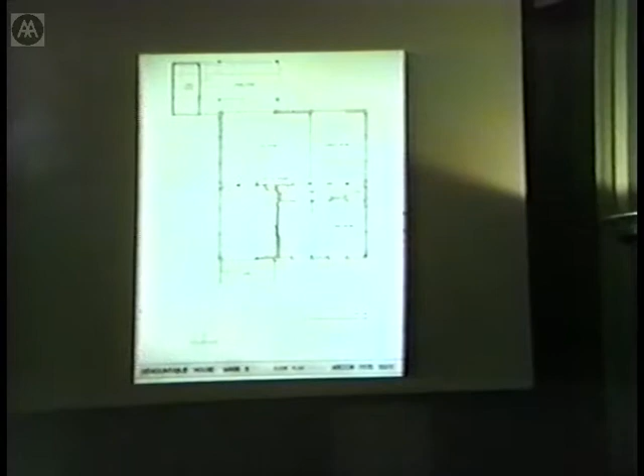The plumbing was a heart unit, a kitchen bathroom unit, which we designed for radiation. The idea was that it was prefabricated as a unit, brought to the site on a low loader, and just dropped into position. You'll see on this plan, and on most of the plans, there's a lot of fittings and furniture. This was typical of housing at that time, where it was obviously going to be difficult to get furniture, so I wanted to reduce the amount of furniture to be supplied to the minimum.

This is a model which, for some reason, was taken to Canada. There's one of the little houses, and the site is shown this way to illustrate how these small Franki piles provide you with a level surface.

We went on trying to use piles on housing because it does divorce you from the irregularities of the ground, and it's easy to get a level surface.

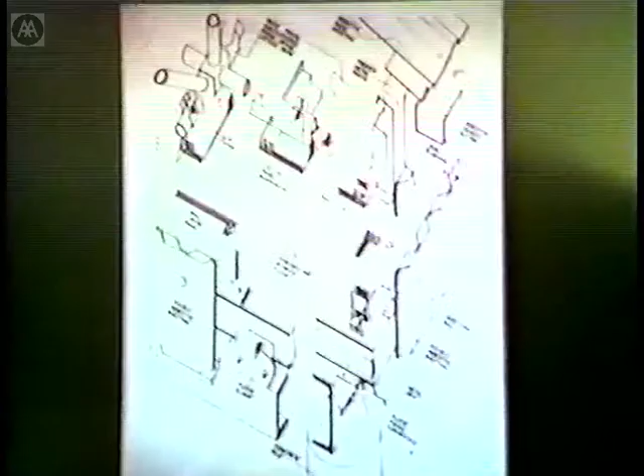This is the construction. I won't go into too much detail here, but the main structure is on two columns with the roof cantilevering out, the roof in tubes, rigidified by the gable ends, which were light steel framing.

Light steel framing on both back and front, with external cladding of asbestos, with that profile which we'd worked out a year previously for various projects we had.

You see double asbestos, an airspace, an inch of fiberglass, and plasterboard. So the insulation was much better than an 11-inch cavity wall.

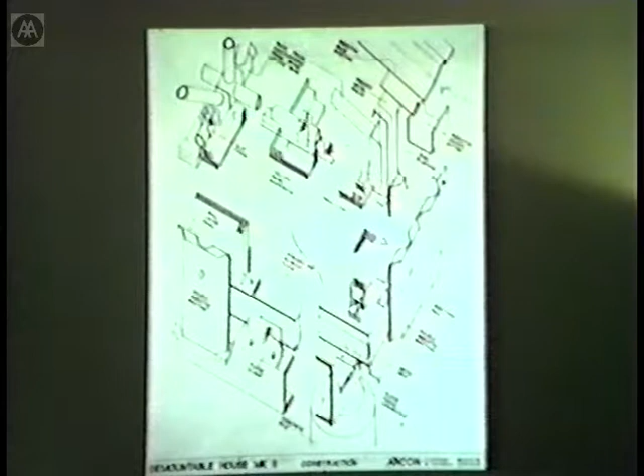It's a pity the asbestos people, Turners, had that panel, which is based on the width of a blanket, an asbestos blanket, and the house indeed was on a 3-foot grid based on the blanket.

Unfortunately, when the ministry changed our plan, they made us go onto a 2'11" grid, which meant that, A, they wasted a lot of asbestos, and B, that the patterns which they'd used were not suitable for use after the war.

So the asbestos industry didn't go on. I think they were stupid not to, but as you know, that sort of profile now is used by the aluminium and steel manufacturers.

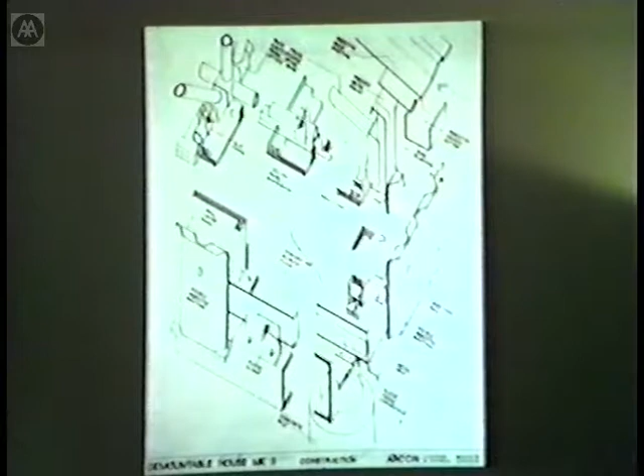This was the front of the house. Dustbin on one side and coal bin on the other, and that's the kitchen in front of it. And the back of the house.

Lord Portal came onto the site, walked through the house with us, and turned around and said, put it on the ground, the front door in the middle, and I want 86,000 houses.

So we went away. Obviously, we realized that we had to do a bit more than that. We were glad he said the front door in the middle, because the ministry plan, or Portal plan, which we didn't like, had the door to the side and was not a very pleasant plan anyway. So it gave us the opportunity of doing a new plan.

At this time, Parliament were getting concerned about these emergency houses. They were concerned that these houses were going to be put up and left up forever. They were also concerned that not many people were getting into the Act.

So they decided that more people should be asked to provide solutions to this problem, and they would want to see another prototype.

This was July. So by September the 23rd, when Parliament reconvened, we had to redesign the house, draw out all the components, get them made and put up at another site, the Tate Gallery.

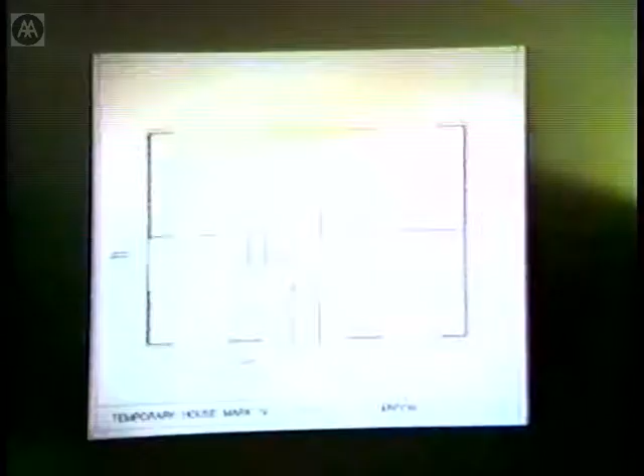This was our next plan, again based on the 3-foot grid. The kitchen bathroom unit was the ministry unit, and that was not taken onto the site in one unit, it was taken in pieces and assembled on the site.

As you can see, there are many more cupboards in that than in the other suite. Better than our original plan, I think, got a separate WC, and it is a bit bigger.

That is 650 square feet, again slightly bigger than the ministry's because they cut a piece out where the kitchen is, to get away into a side door.

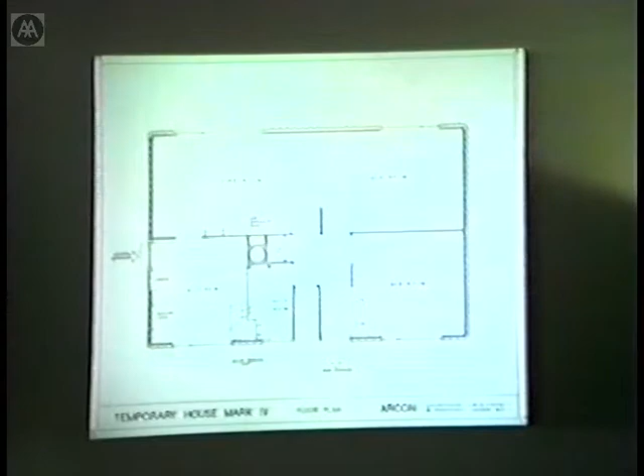This is the structure. This was purely a mock-up. We couldn't, in the time, possibly design for mass production. So the steel frame and so on, just what we could get hold of.

But again, we'd use the external cladding, we'd use the same kind of internal partitions. We streamlined the method of locating and lining up the panels.

We improved the ceiling panels and the structure. This is just tubular roof trusses sitting on a steel frame.

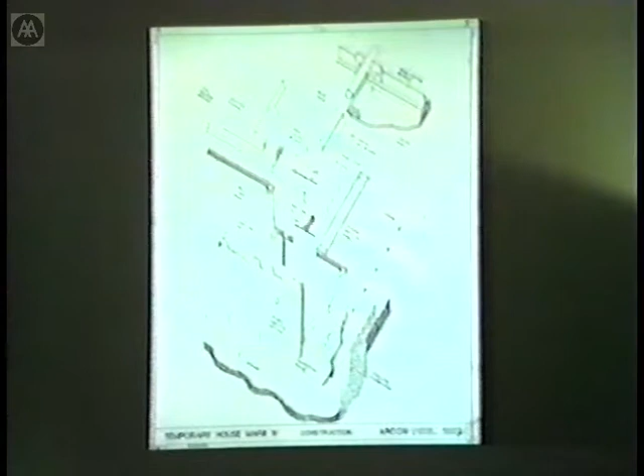This is the outside of the house, the back. When this was put out, we had people sitting listening to the various authorities, the local authorities who came around, MPs and so on, listening to criticisms.

Unfortunately, most of the criticisms were things like they don't like glass at the bottom of the window because they get broken. So on the final house, that was filled in as solid.

The snag of talking about houses in mass, 86,000 houses, is that every time you talk about anything like that little pagoda, everybody multiplies it by 86,000 and likes to save a lot of money.

Essentially, the colour of the house was chlorinated rubber paint, and it was a brown colour. The colour was selected by Rodney Thomas, who picked a leaf up crossing Green Park. And we sent that to the manufacturers who very decently didn't complain.

This is one of the side doors. The whole thing was pretty well detailed and pretty neat. You can see the fixings. The outer fixings were toggle bolts, which were screwed in and out, so you could take the sheets off if anything broke. But we had the problem of whether children would take the sheets off if we left them like that. So there were little tiny studs, rather like the top of a billiard cue, pushed in afterwards.

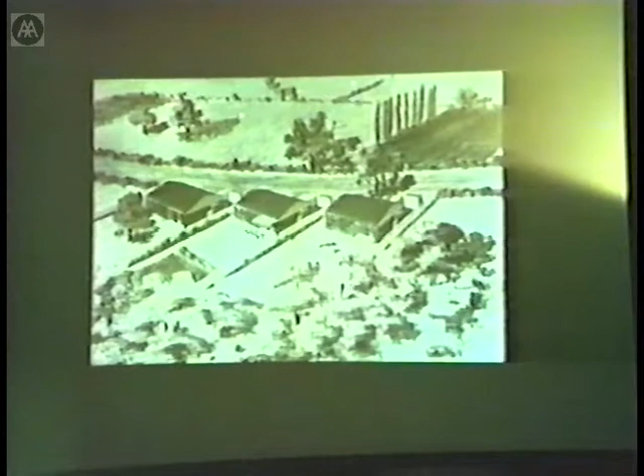And this is a perspective which Rod Thomas did, showing the houses as far as you can imagine.

It's interesting that an MI5 gentleman came to see us, and we thought we might have selected somewhere which had some secret business, but he asked if he could have some of the photographs. They were going to drop them behind enemy lines to show the Belgians and so on what was going to happen in Britain after the war.

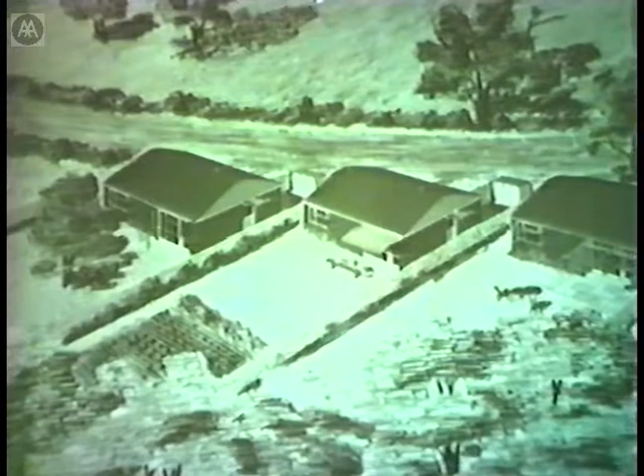And a number of these houses were put out in different parts of the world, in Cairo, Belgrade, and other places where our troops were, Hamburg, to show the chaps. And we have a lot of letters from the people who put them up - very interesting, the troubles they had, or didn't have.

So anyway, there we were with that house. Now this was October of '44, and we were given till the end of December. Actually we had 6 weeks to do full working drawings, shop drawings, and everything else for another house, for the new scheme. We managed to get to the following February by a bit of argument. Incidentally, we were not looked on as very decent chaps - we were always arguing about the difficulty of things.

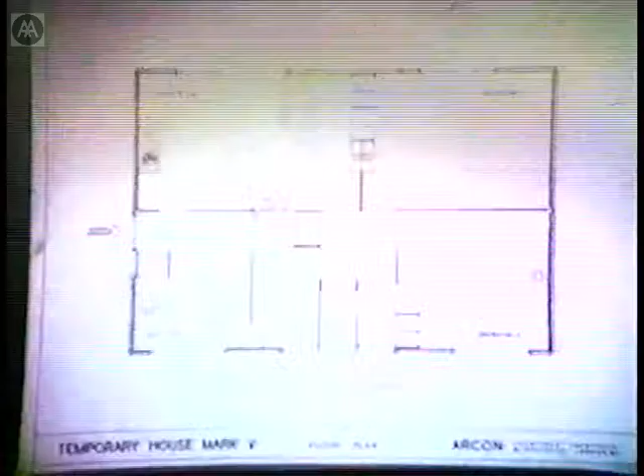The next house, which is now to the new dimensions, that's the standard Mark 5.

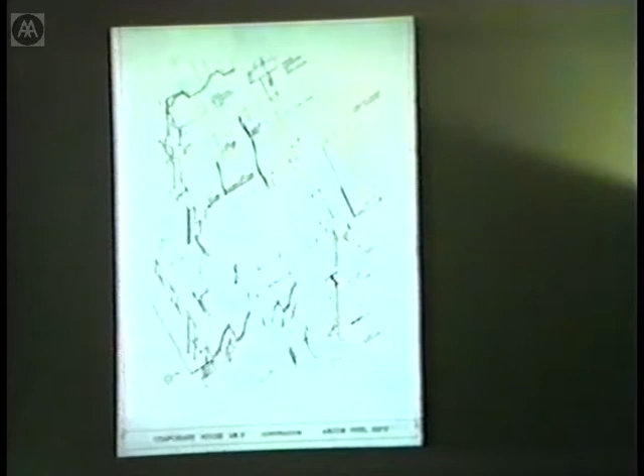And that's the structure. Because we had so many ordered, we could have the roll form sections specially designed and save a good deal of steel by doing that. The trusses that you see are still tubular. We went into a lot of problems on tolerances and corner techniques and cover techniques and so on - problems we'd learned to fight on the other jobs.

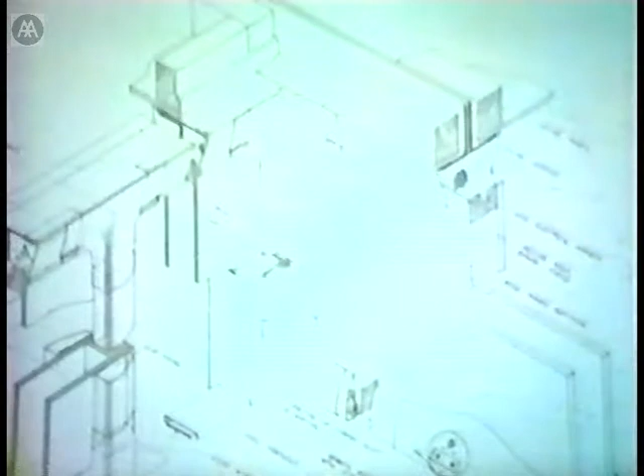This is the cover technique, which is intended to take up tolerance from the wall panels. I remember the chap designing that going frantic as we constantly changed the size of the timber panels because the government decided it had to come from Russia or Scandinavia or Canada or wherever it was, and the scantling size had altered. And he at last said, for God's sake, put in an intercom and announce every 10 minutes the thickness of the wall panels.

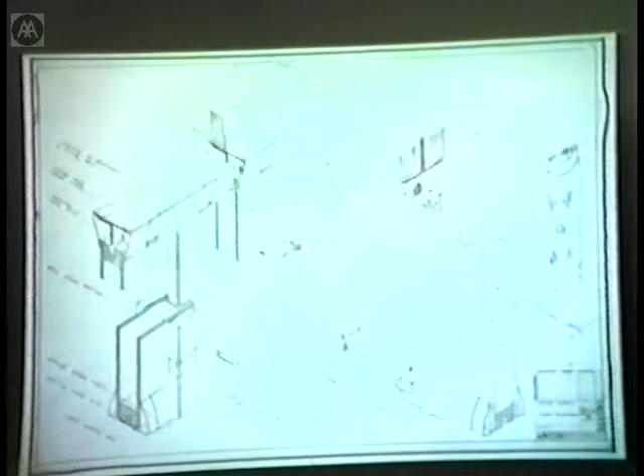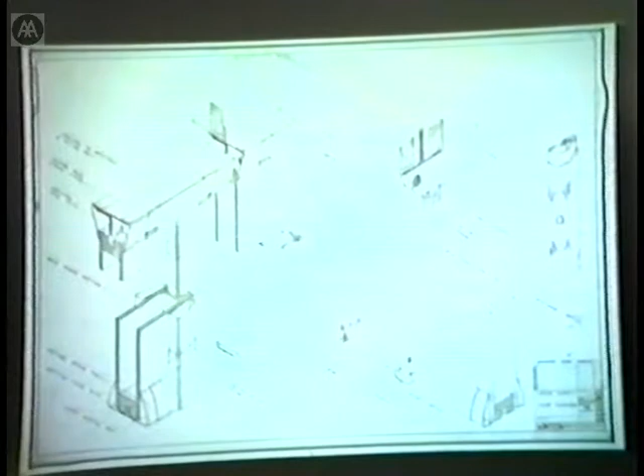Anyway, eventually we got it done and got it up. Before we go on, you can see that we had the switches pressed into the door surround and the socket outlet pressed into the skirtings. These things were just clipped on the bottom, but the corner connection had to be screwed on because it was necessary to get electrical continuity in the system. The electric wiring, as you see, went behind the curtain.

Well, that was the house. As you see, we had designed another element here over the entrance door. You see how we got over the entrance door being in the middle? It wasn't actually, but there was a wall panel in the middle, part of which was wooden. Unfortunately, we couldn't find any substitute for chlorinated rubber paint to paint the actual cladding, so we were made to leave it as it was.

Now, I think that's - well, yes, I would say, no, this is, I think, another one. Yes? I think this is another slide. I see, I thought it was another one.

I was going to tell you that these houses were put up at Crayford and Croydon, the first 100 houses, and they were used to take films of the erection and to time the erection and so on.

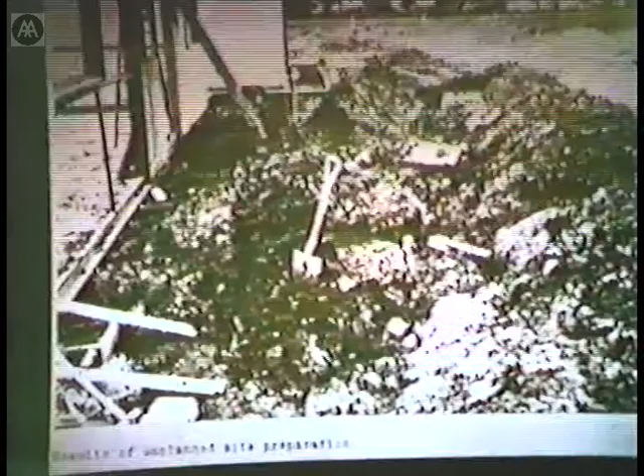Now, the erection of the house took 107 man-hours. Actually, 390 man-hours was allowed for bonus payments, but it was put up in less. In fact, one house was put up starting at 5 in the morning, and they had a habitation certificate by midday. But the houses took between 8 and 10 months from the handover of the site, including foundation and so on. I put this in just to show why it took so long, from 390 hours to the finish of the job.

This was a problem which we didn't tackle till after the Mark V. Now, I've only dealt with the design side. The problem of the organisation necessary to get these bits from the manufacturers onto the site, checking, preparing drawings of jigs and so on, were all done by Taylor Woodrow, who throughout the job employed 6,000 people on that side. We had about 20 people doing our bit, but it was an enormous task. They had 30 centres from which they distributed things, and collecting that stuff together was a fantastic business. Besides, as we said earlier, much of it was done during wartime, when it was very difficult to get work done.

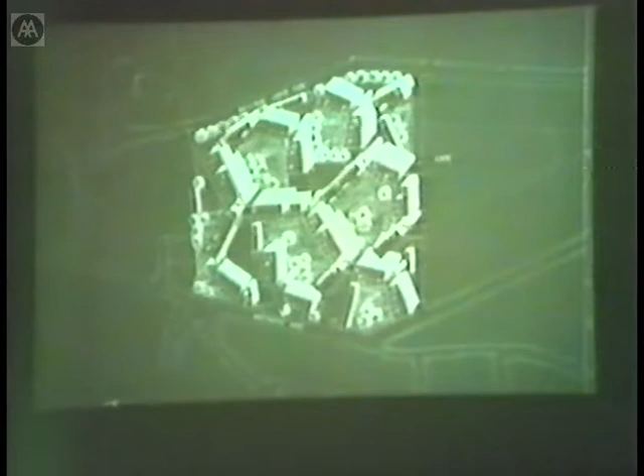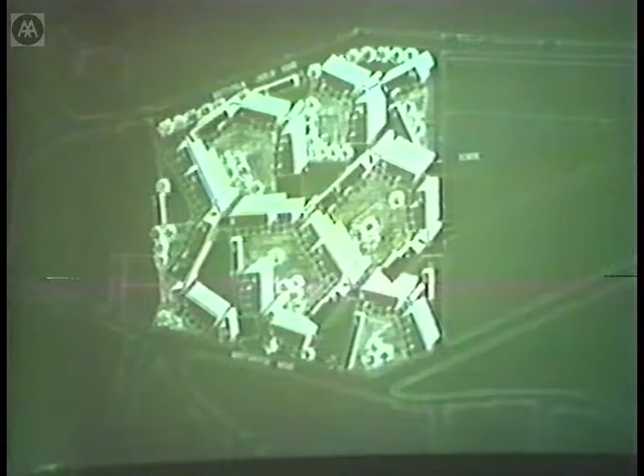I designed with a group of people for three sites in the LCC. We developed a system of houses and flats which could be strung together along decks and arranged according to the shapes and needs of each site.

In doing it, one began to find that by putting the units next to each other in a continuous way, whatever the size, and above each other, inevitably they had to relate in terms of dimensions and services. And it led one, rather naturally, to think of making bits which were standardized in the factory.

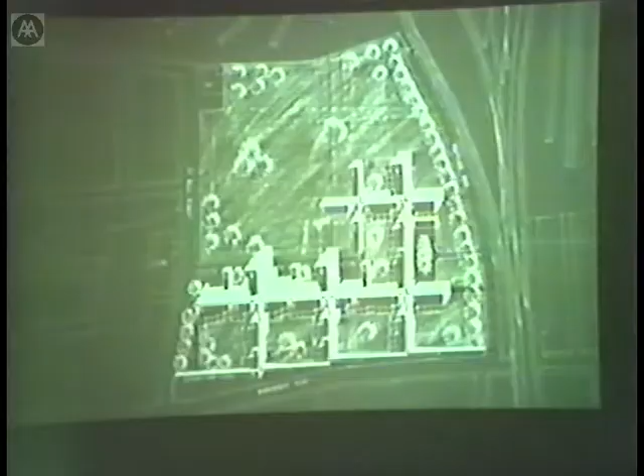Systems really tended to exist abroad at that time. We asked Kenneth Campbell, who was then in charge of the housing division, if we could investigate systems for this method of housing for different sites. He said, we tried it after the war, it's too expensive, it's no good.

But in fact investigations were going ahead, though systems as they existed tended to be really the panelization of slab blocks.

You subdivided a slab into a set of bits which could then only produce that slab. It wasn't a Lego, it wasn't a flexible concept, it wasn't a system that one could understand, at least as an architect. It was simply a way of prefabricating a set of panels out of which you could only make the same model aeroplane. There was no alternative possible.

I had an opportunity in the LCC of working on that sort of system, and in fact worked on Morris Walk in Woolwich, where one was also obliged to develop tall and low blocks with a given system.

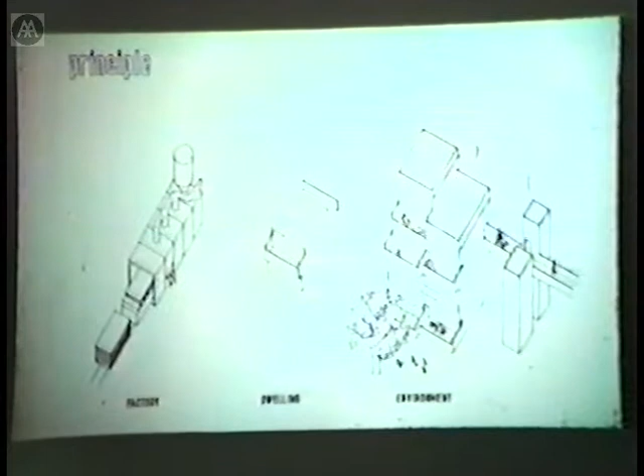So the system we developed was really this. It was an awfully simple idea. It was really a family of houses and flats, maisonettes and flats, which you could stack up one above another and next to each other, and to which you could add your towers and bridges. And because, as with that earlier LCC idea, they had physically to be related, they naturally shared dimensions and services, and were therefore suited to factory production, whatever the factory, whatever the material.

So this was the family of house types, of various sizes, to look in different ways, with different internal arrangements.

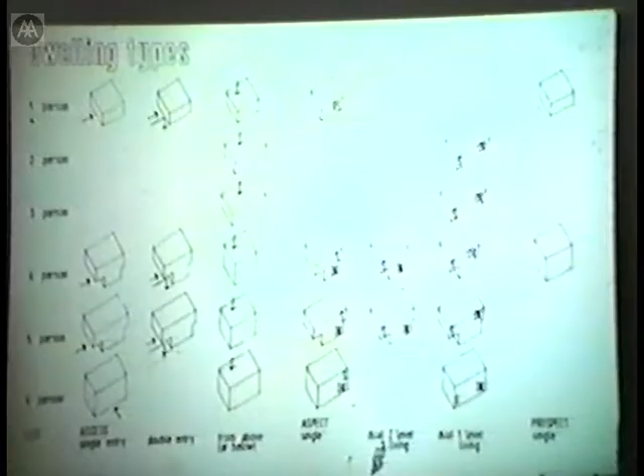That was how they could be, some of the ways they could be stacked up. And that was the sort of basic concept of how they might be subdivided.

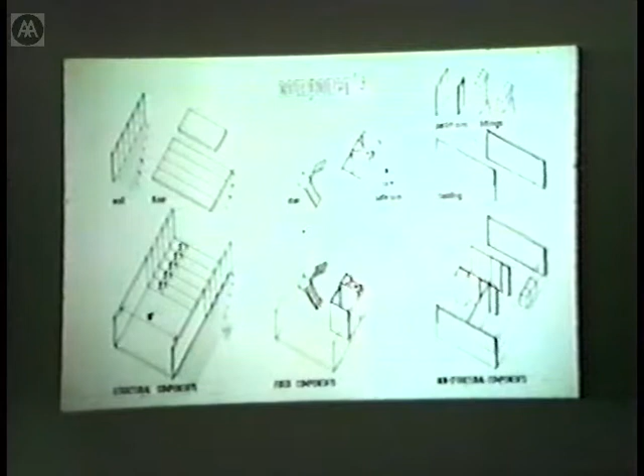What we did was to get together a program of 4,500 houses to be built over 3 years, and a performance specification, asking 3 very carefully selected contractors to show how they would be able to create these volumes, whatever material it might be, although we knew 99% of the existing systems were in fact concrete. We hoped maybe the cladding at least might be pressed steel or something, but concrete constantly was the best buy.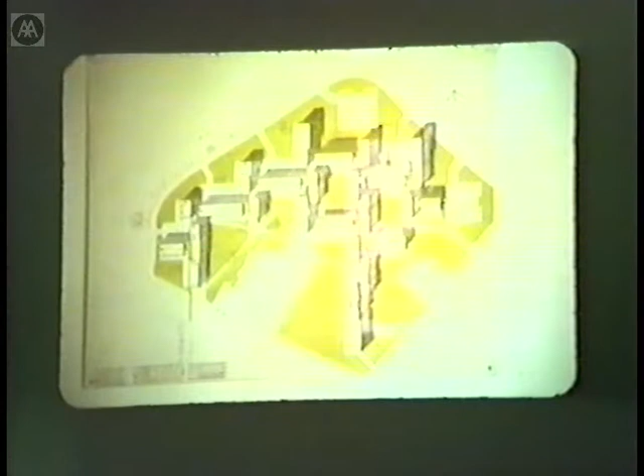As it was underway, and I'd been 6 years in Leeds, I left, and coincidentally at that time a whole series of events happened. The 4 cities had all been staunchly Labour, and it was a great joint Labour exercise which the councils enjoyed, and 2 new Conservative councils immediately withdrew and abandoned their second sites.

There was almost a stop in the production of housing, an enormous cutback in the housing programme. Whereas before high densities had been encouraged and subsidised in the centre of towns, there was a swing against high densities. And the final disaster, of course, was Ronan Point, all in 1968.

So suddenly, in the first site in Leeds, where people who'd painfully waited to be rehoused in Hunslet, for which they still retain some affection, were moved out, the gas heating was ripped out. Electric heating was put in, to be followed rapidly by paraffin heaters and condensation.

I think another aspect which I still believe in is that housing should have an ordinary quality, and that one should aim for it. It should neither seek, on the whole, except in very special situations, to be high architecture, nor low populism, if you like.

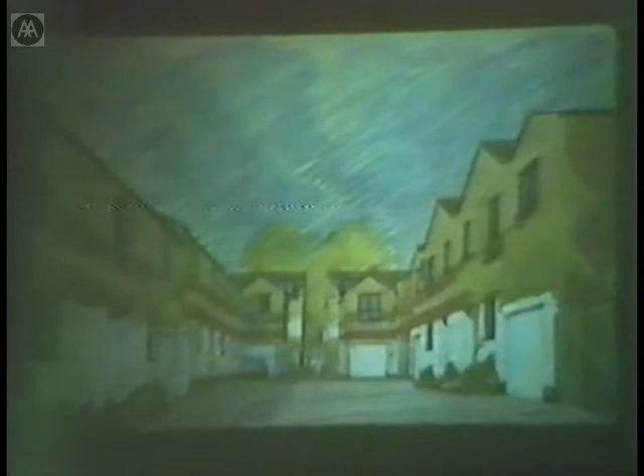And finally, I think, in spite of these setbacks, one has to continue to try to progress. That's the end, that's the last. That's it.

Lastly, Richard Rogers, I won't say he needs no introduction, he probably needs a long introduction, but there's a bit of time. At lunch last week he said he was going to talk about industry. I have some sense of idea what he's going to talk about. I haven't a phrase of my own to introduce him with, but by accident I stumbled on a bit of Jencks from Bizarre Architecture, coupled with a remark somebody made to me the other day, that you look like the Leonard Sachs who introduces those pseudo-Victorian old-time music hall things with a gavel. So I will introduce Richard as that modern master of mechanomorphic metaphors. Richard.

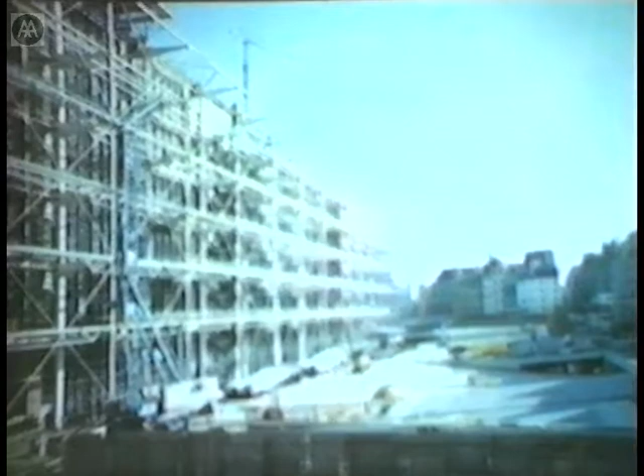Both are made out of component systems, and partly out of off-the-peg systems, but only partially. Specifically Beaubourg on the right, Centre Pompidou, which is big enough to have its own specially made components. These are not off the peg any longer. They're obviously - time, cost, control are all part of the philosophy.

But what we're trying to create is an expression which not only had a sort of technological excitement - which we were obviously excited by, and have always been excited by, the whole idea of technology - but also something where the framework was sufficiently loose to allow for change, and yet sufficiently clear to give a certain permanence.

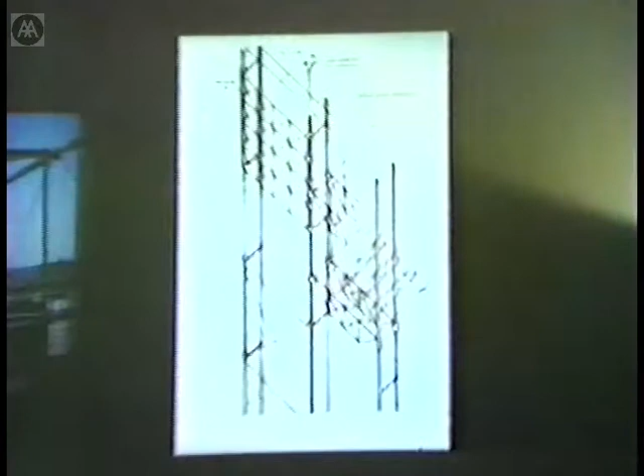On the right was the first sketch - in fact it was a competition drawing for the structure of Beaubourg. Two columns and a structure. The two columns were on the outside, in fact two walls really of structures. One was for mechanical services, another one was for movement systems.

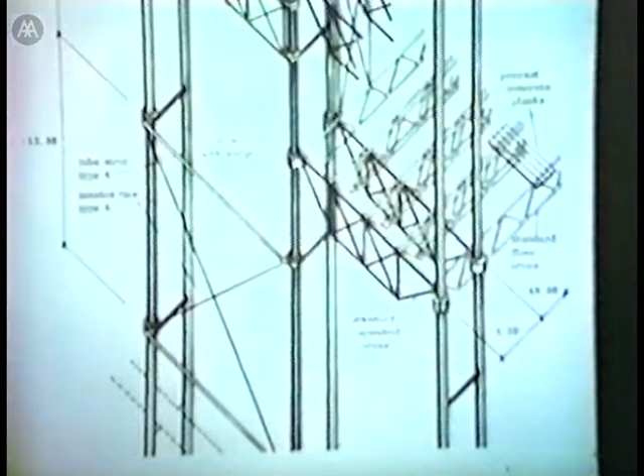The whole complexity about how to take a load of the beams spanning 48 meters between two columns was resolved on the left-hand side upon this system, which is in fact originally designed by Gerber, a German engineer of some 80 years ago, and the design of the bracket on the right.

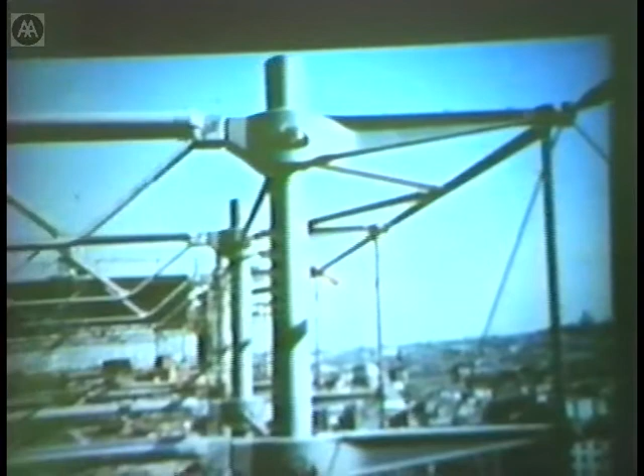Now there are hundreds, obviously thousands, of designs for a bracket system, and at that point there's this complex mixture between what is measurable and what is not measurable, between the science and the art.

The column, which is a water-filled column, and the bracket, and the way to minimize the load, and the excitement for us of working with engineers to try and work economically to span the 50 meters between the columns by pulling down on the right-hand side with tension cables and by expressing all the parts.

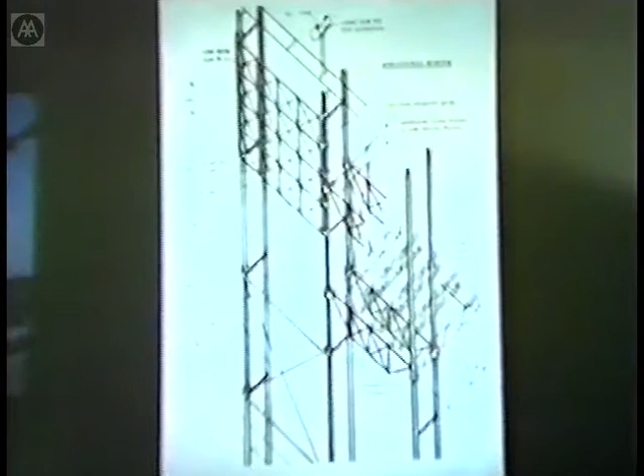In a sense, going back to Reliance Controls before, again a key element has always been to try and express, to create a language out of these parts, to make it legible from the outside. That to us is very much the way we look at the whole component system. What we like about components is a certain clarity of legibility - if you look at it you can see what each part is actually doing.

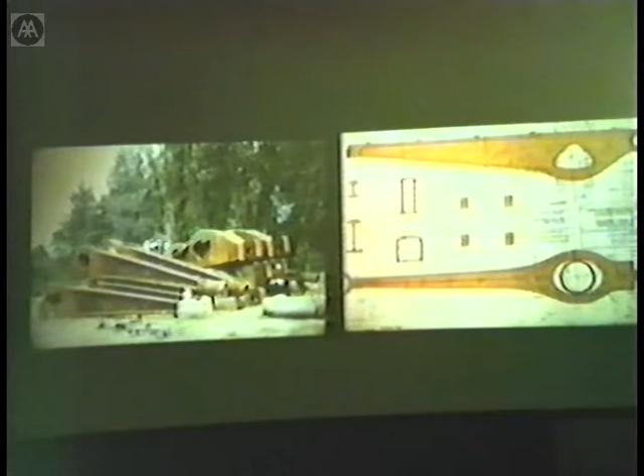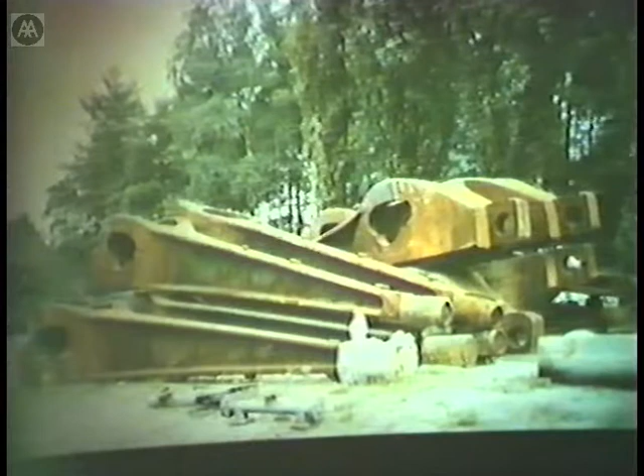And the study - here again, the whole study of detail, the idea and the excitement we got in actually forming the different parts and trying to shape them in a way which both met the functional needs, but also the architectural or the art need.

And so that is the Gerberette. That is a 10-ton bracket, and that's a casting. It was designed by Arups together with ourselves and built in Germany by Krupp. And those are the Gerberettes out in the wilderness - this relationship between the hard technological elements and people, or trees, and elements.

And the making and the design - for instance, the hole through which the column goes through, which has to be loose enough for the bracket to fit over the column and into place, and which has a million different shapes, but only a few of them which relate to the total building.

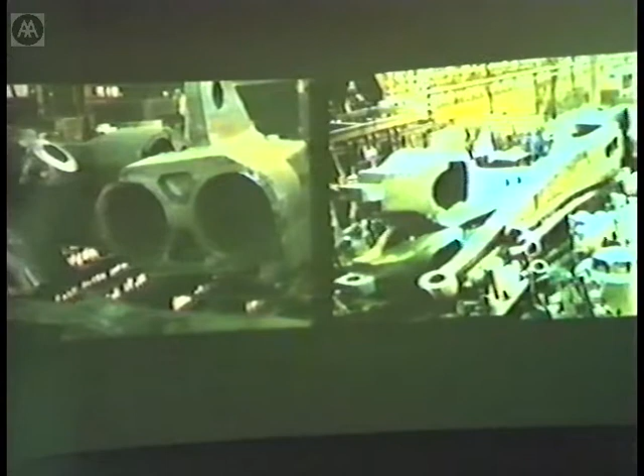This is the bracket, the sort of T-bracket, if you like, on the right. You can just about see the person on the right, which gives you the scale of the overall element.

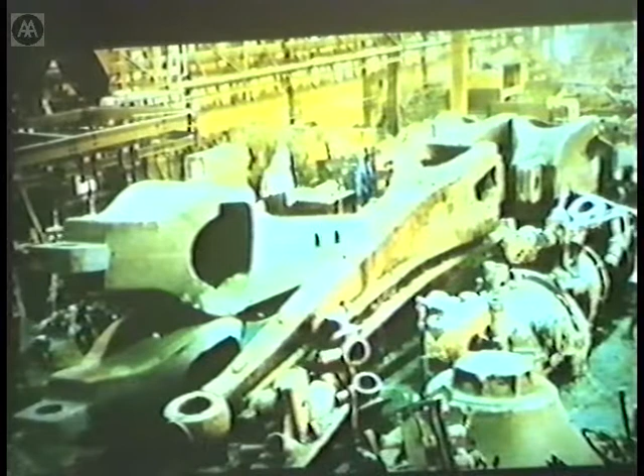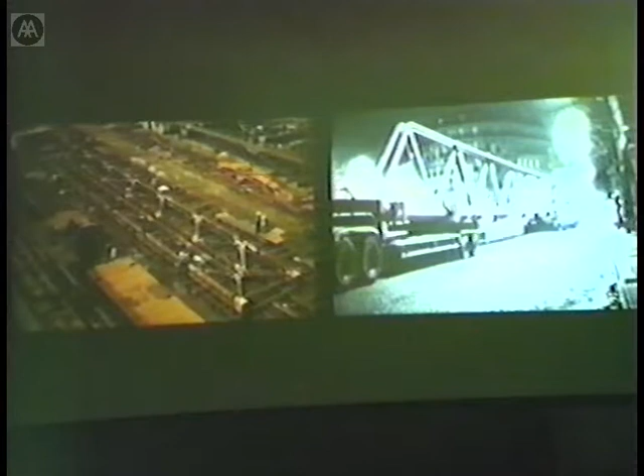We learnt a lot from studying Victorian stations, and then from studying some of the Japanese work done with cast steel. Basically three forms of steel were used: the beam, in which all the tension pieces were solid steel round, the compression pieces were tubes, and all the nodes, or Gerberettes, were castings. This really created the language, the continuity throughout the building.

Here's one of the beams, one of the 50-meter beams coming through Paris at night time. They would arrive once a week at 3 a.m., and every time, there would be a group of engineers and architects having a party, and lots of other people would turn up because it was an occasion. It was part of the excitement of building out there.

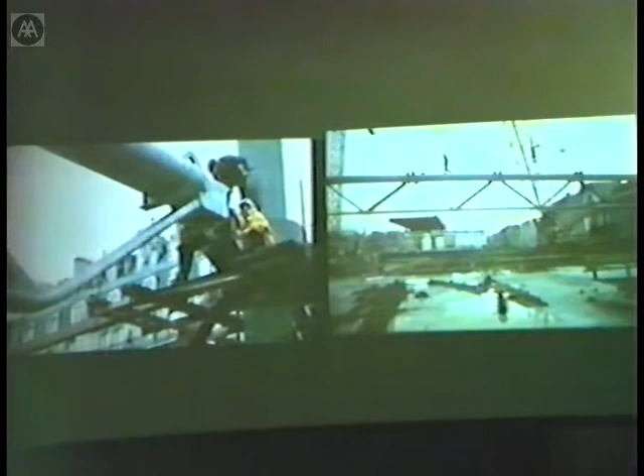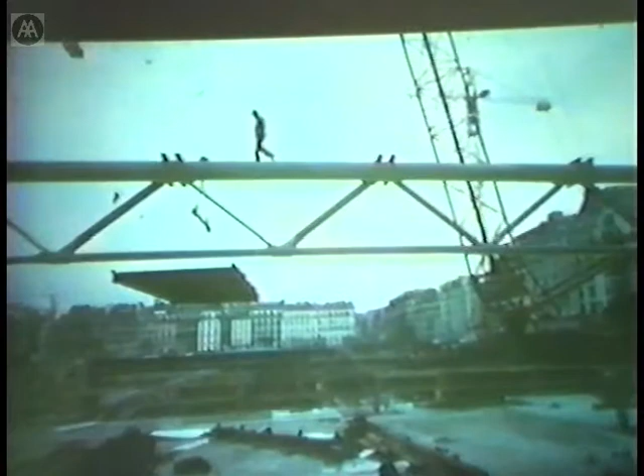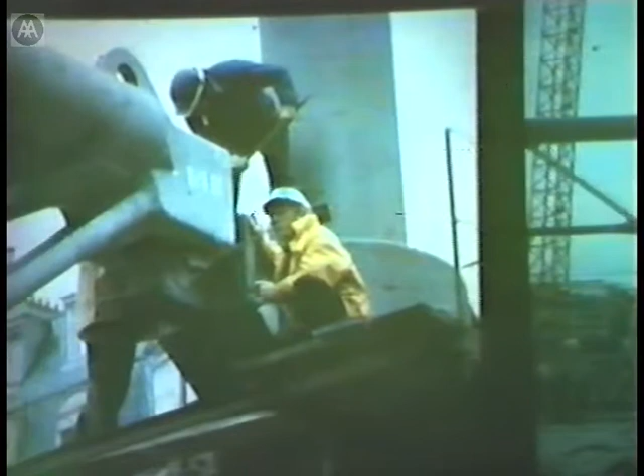They're putting it together dry, so that everything could move. There were no expansion joints because every piece, rather like a vertebra, could move. Everything moved so that it could take expansion, contraction, lateral, vertical and diagonal loads, and the scale of the pieces in relation to the human being meant each piece was expressed. If you look at the diagonals in the beam, each diagonal expresses the different force that acts on it.

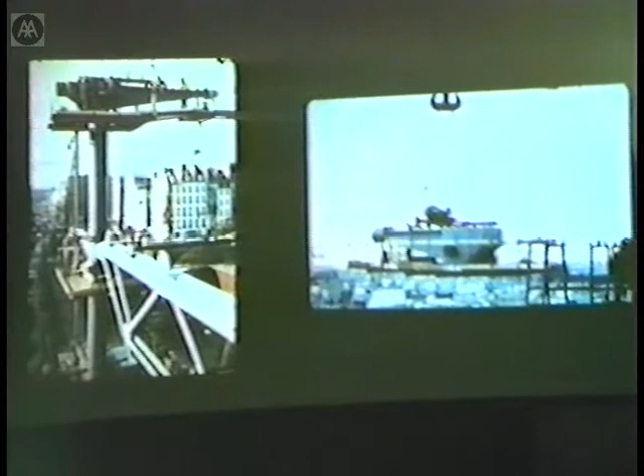The gerberette being dropped into place at a right angle and swung round. One of the strange parts of this building in Paris was that though we were all foreigners there, once we started to build, it became very clear we had to use French materials. Apart from anything else, our client was the Minister of Production, and his interest was obviously French production. But very soon we realized we were going to have major problems with the budget.

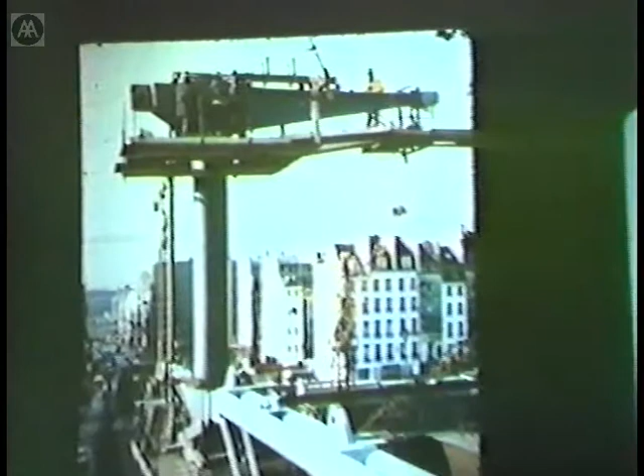We had a fixed budget, and the French industry were going to get into a ring. They clearly formed a ring, and we were sufficiently young and furious to try to break that ring. When we started to check out, we realized that nearly all major buildings, whether it was the Frei Otto's Olympic steel structures or the bridge over the Bosphorus, all these were pretty clearly, to our mind, rigged prices, and it was going to be very difficult to break through this ring.

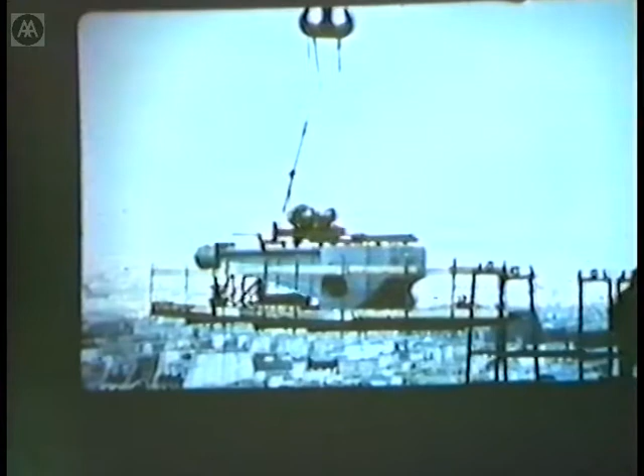We went to British Steel, American Steel, Italian Steel. They all said, of course, you're just green. The only people who dared to break the ring, of course, were those liberal organizations, Krupp Steel and Nippon Steel. We were basically allowed to use Krupp as long as we didn't tell anybody we were using Krupp.

In France, all buildings are built by Algerians, and the average French building site looks like an Algerian encampment, and they build very efficiently. When the Germans came in with their bright new blue uniforms and built great big new huts, putting a diagonal system of huts all the way across the site, it was pretty clear what was happening, even though we had a member of the French building organization actually painting out the word Krupp on all the pieces of steel as they arrived.

Apart from anything else, these brackets look just like cannons over Paris, which the press soon got hold of. And between blond Aryans against Algerians and so on, we had great difficulties.

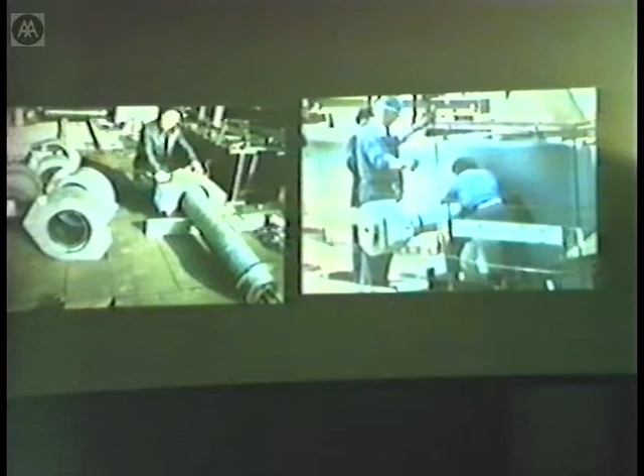These are the pins that go through these brackets. And again, this whole question of the excitement we get from seeing the way the pin fits in, the shape of the pin, the way you tighten it, and so on.

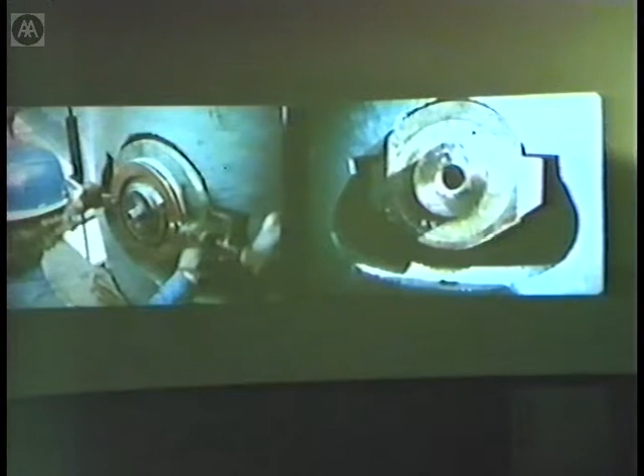Actually the shape and the forms and the relationship between this whole strange line between art and architecture, between art and science, between how you actually design each of those pieces. What is technology?

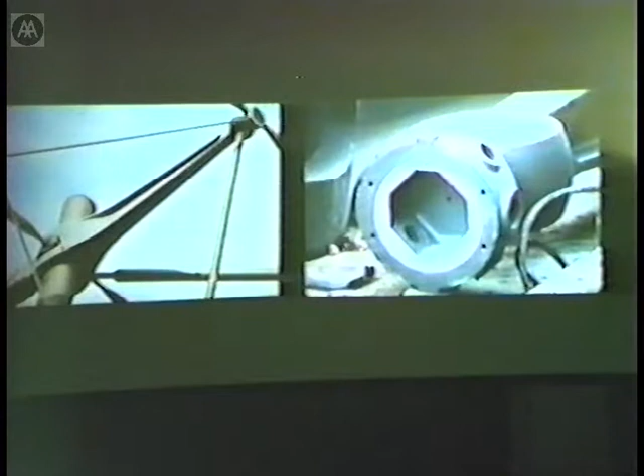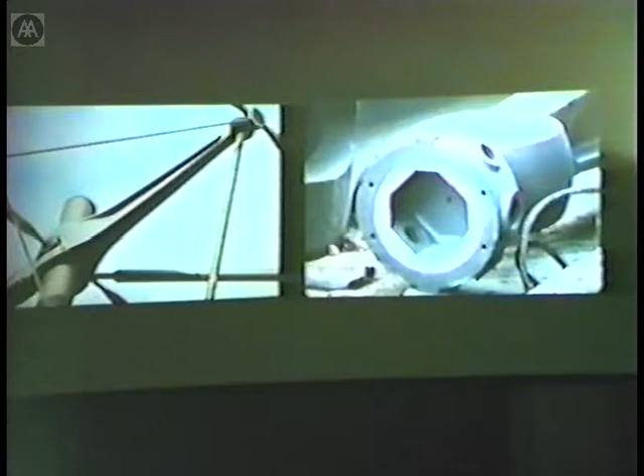On the left, the expression I was talking about of all the forces within the building, which are expressed very clearly, very legibly. This whole mixture of layering, of different levels, of the outside, the inside, and the middle. And the end, which is the rose that takes other pieces like the escalator later on, or which takes the flags, the exhibition flags.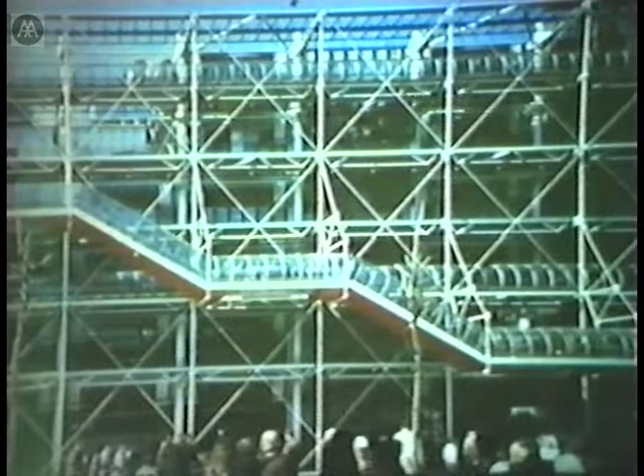And the last slide — the success, in a sense, and obviously there's an argument which will go on about Beaubourg, is that it is very much used by people. It does not have 5,000 people, which is what the brief talks about — it's 50,000 people per day at the maximum, and an average of 25,000 people. Technology doesn't specifically have to be a hard or soft thing; it depends how it's used.

I had difficulty with one of the remarks which was made, I think by Martin, about buildings which are ordinary. I don't really know what ordinary is. I find ordinary rather boring.

In the end, I think one always tries to stretch further than one can reach. That's part of the excitement. And one is trying to create all the time, sort of answering certain responses.

So that part starts to answer one of the problems which intrigues me. And it becomes a public activity. It's no longer an elite activity. It's no longer the South Bank, in the sense that the South Bank answers a specific element. The cultural South Bank answers a specific element, which is high culture. But yet, really what one's looking for is something which one can do at any time of day. And if the right answer is to use...